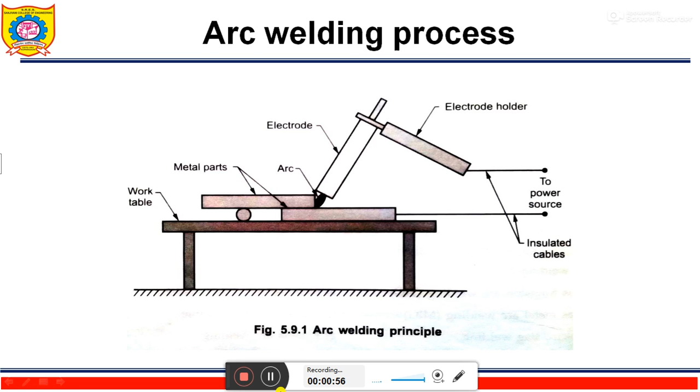It is a fusion welding process in which welding heat is obtained from an electric arc. The temperature at the center of the arc is about 6000 to 7000 degrees Celsius. The base metal is melted by the temperature of the arc, forming a pool of molten metal.

Either AC or DC supply is used. The electrodes used in this process are of two types: bare and coated electrodes. The length of the electrode varies from 250 to 450 mm, whereas diameter varies from 1.6 to 9 mm.

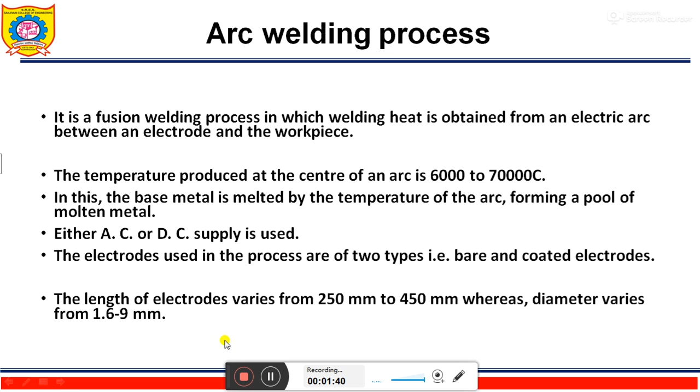Advantage of arc welding: it is the most versatile process, which can be applied for both thick and thin sections. Welding of complicated shapes can also be done by arc welding. Welding can be done in any position with high weld quality, and welded parts are neat and smooth.

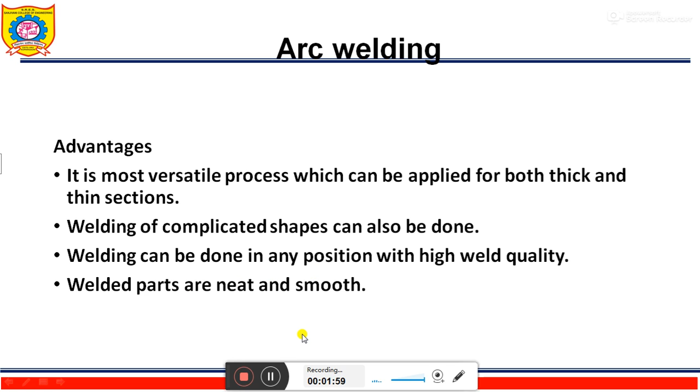Disadvantages: as the electrodes are coated, the chances of slag entrapment and related defects are more. Welding control is difficult, and the process needs filler material. It is a slow process. Applications include air receivers, boilers, pressure vessels, fabrication works, automobile, chemical and aircraft industries, shipbuilding and bridge construction.

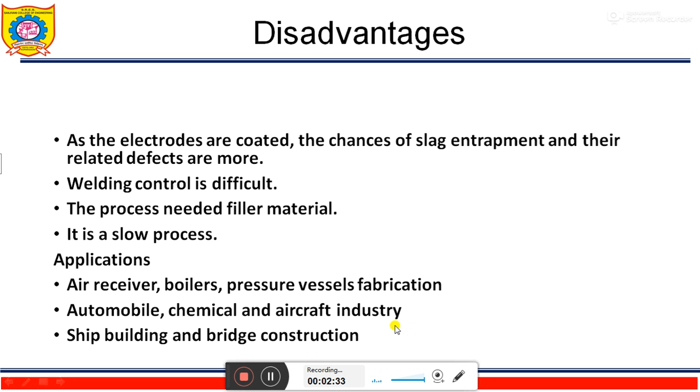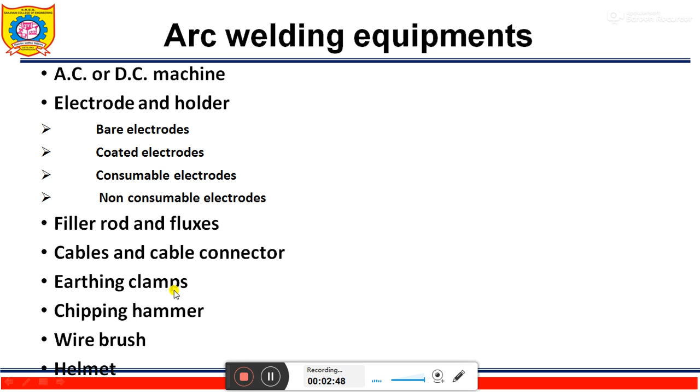A number of applications are there. Arc welding equipments: AC or DC machine, electrode and holder (bare, coated, consumable or non-consumable), filler rod and fluxes, cables and cable connectors, earthing clamps, wire brush, and helmet.

Carbon arc welding is the welding process where coalescence at the joint is produced by heating the workpiece with an electric arc struck between a carbon electrode and the workpiece. Welding may be carried out in air or an inert atmosphere. Filler metal may or may not be used.

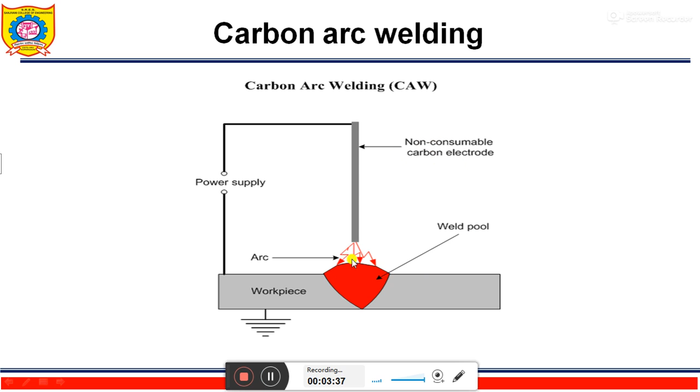Gas tungsten arc welding is also called tungsten inert gas welding, or TIG welding. It is an important welding process, an arc welding process where the joint is produced by heating the workpiece with an arc.

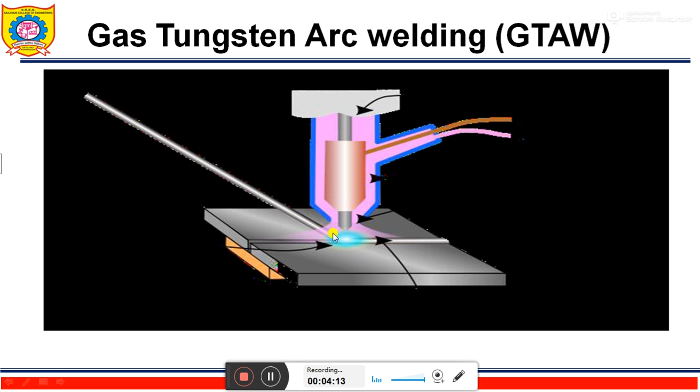Heating the workpiece with an electric arc struck between the tungsten electrode and the workpiece. To avoid atmospheric contamination of the molten weld pool, a shielding gas is used. If required, filler metal may be added.

To start the process, welding current, water and inert gas supply are turned on. The arc is struck by touching the electrode with a scrap carbon piece. Then the welding torch is brought near the workpiece. When the electrode tip reaches within a distance of 2 to 3 mm from the workpiece, a spark jumps across the air gap between the electrode and the workpiece.

Then the air path gets ionized and the arc is established. This shows the welding torch. Welding continues by moving the torch along the joint, and at the far end of the workpiece edge, the arc is broken by increasing the air gap.

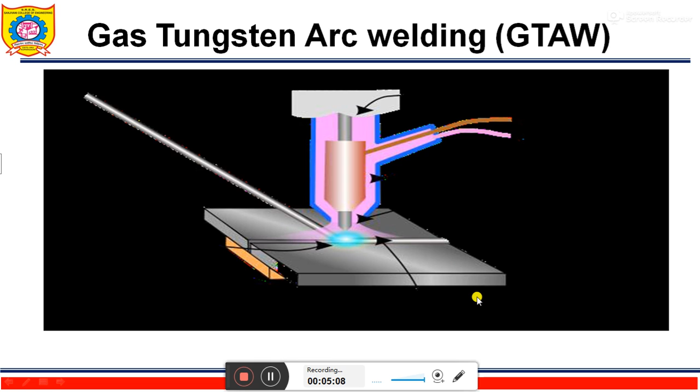Advantages of tungsten arc welding: no flux is used, there is clear visibility of the arc and workpiece with better control, it produces smooth and sound welds, and no weld cleaning is required.

Limitations: cost of equipment is high, it can cause weld metal contamination in case filler rod comes out of the shield, it is a slow process, and a separate filler rod is required.